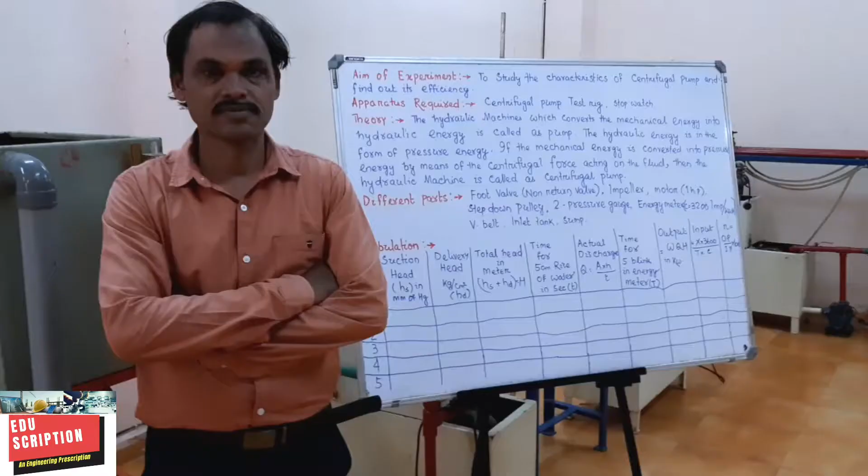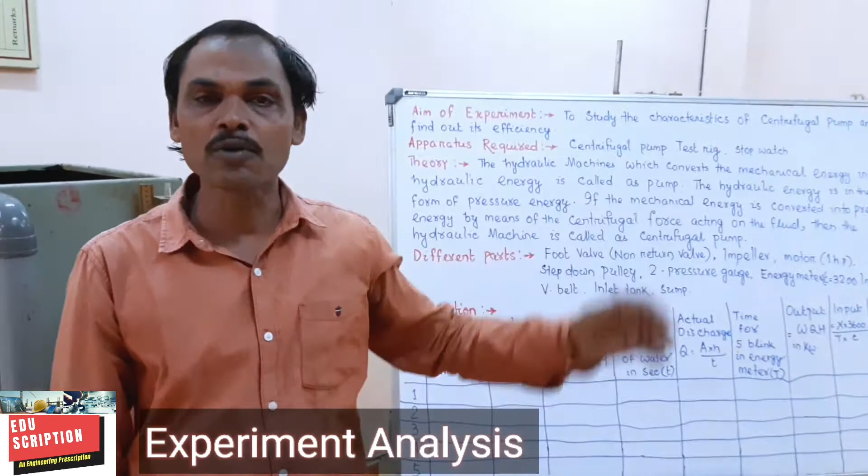Okay, my dear student, today we discuss the centrifugal pump. So first of all, your aim of the experiment is to study the characteristics of a centrifugal pump and find out its efficiency. Clear about it?

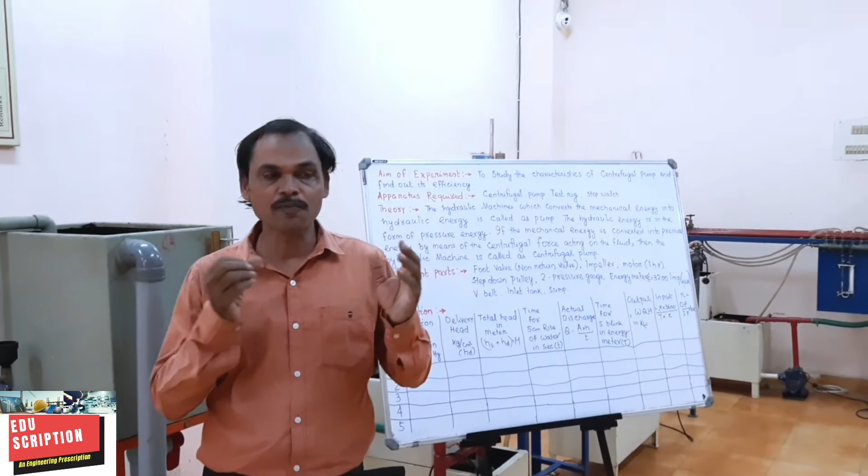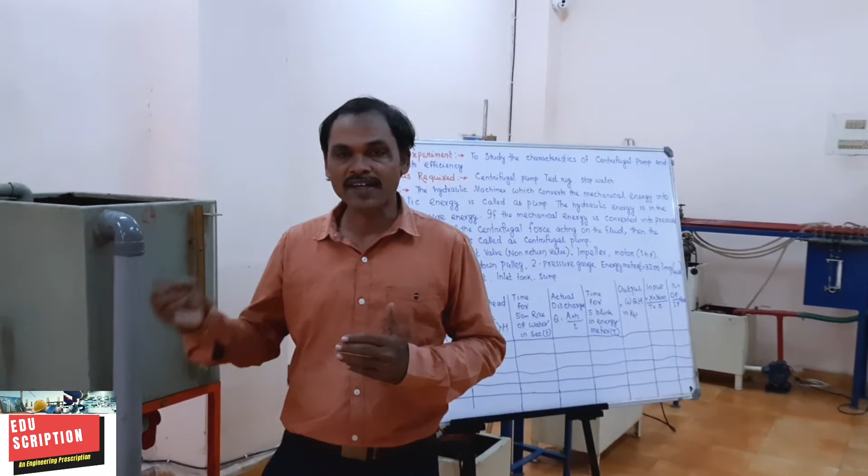So first of all, what is a pump? The hydraulic machine which converts mechanical energy into hydraulic energy is called a pump. The hydraulic energy is in the form of pressure energy. Clear about it? So if the mechanical energy is converted into pressure energy by means of centrifugal force acting on the fluid, then the hydraulic machine is called a centrifugal pump. Clear about it? Next we move to the different parts of a multi-speed centrifugal pump.

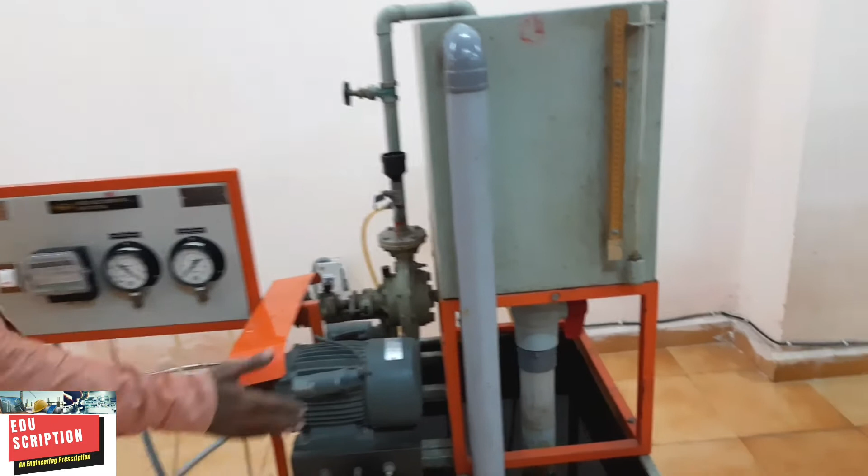So this total arrangement is your test rig. Now we start from the bottom. This part is the sump. Here is the suction pipe, and at the tip of the suction pipe there is a non-return valve, which is called the foot valve. That means the water will flow in one way only, not return downward.

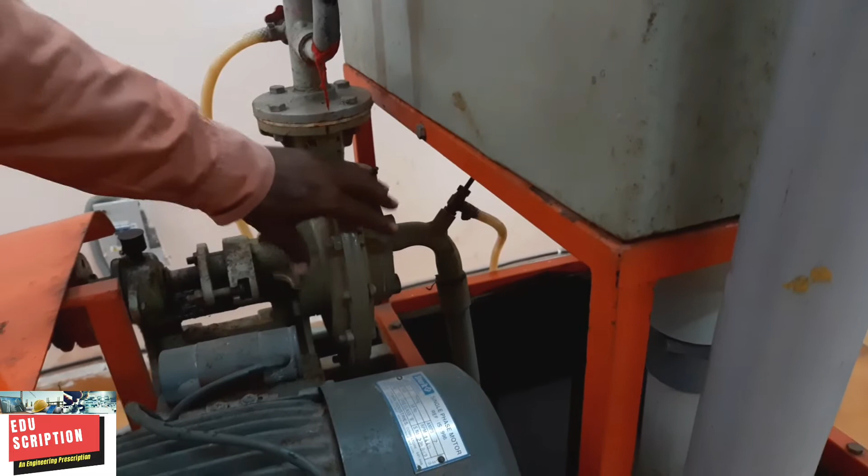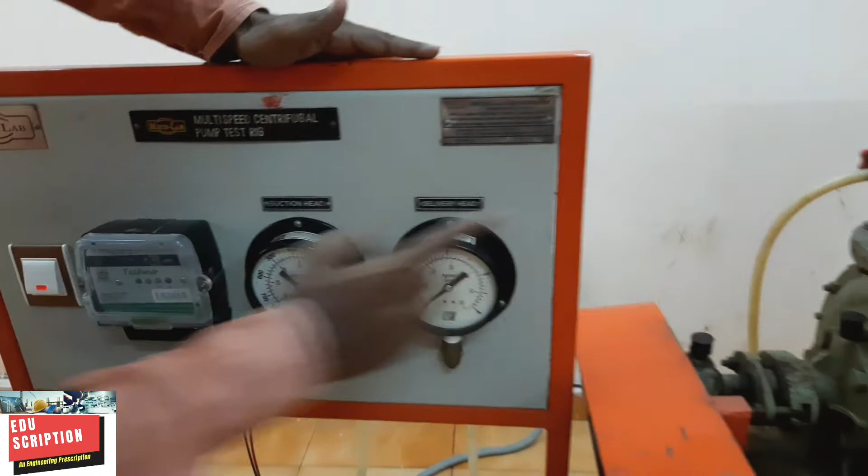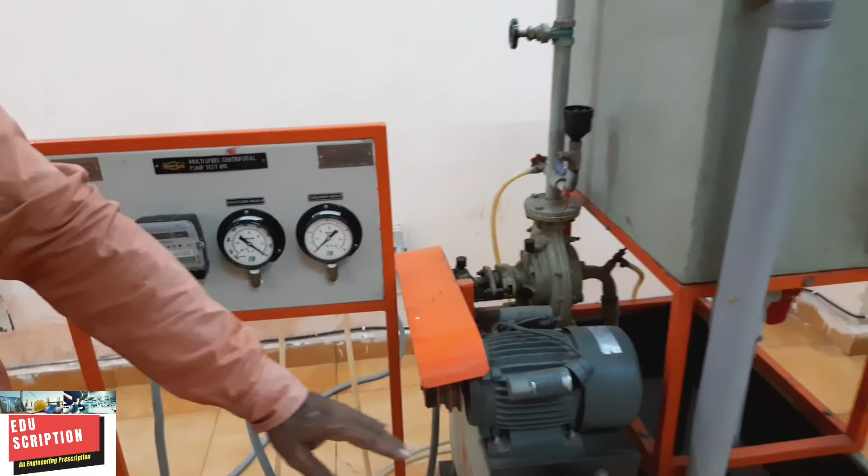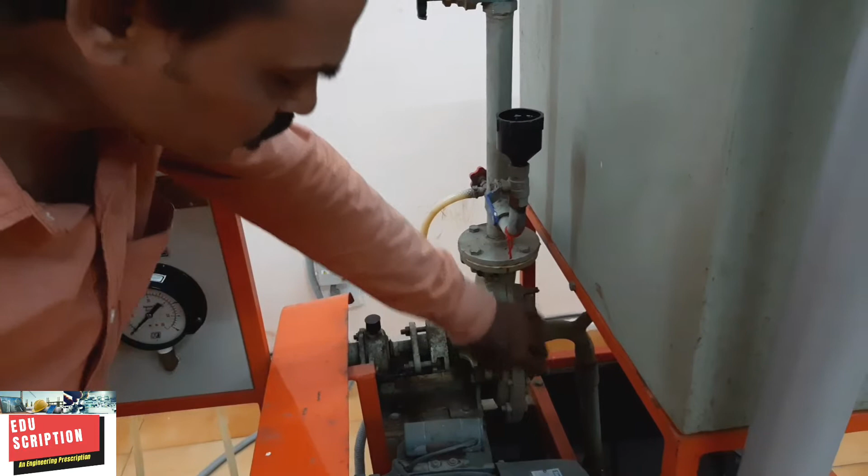Next part is the impeller. Before the impeller, one cock is arranged here. This indicates the suction pressure in the panel board. That is your suction pressure. The impeller consists of a series of backward curved vanes, and it is mounted on this shaft. The upper part is the casing which covers the impeller.

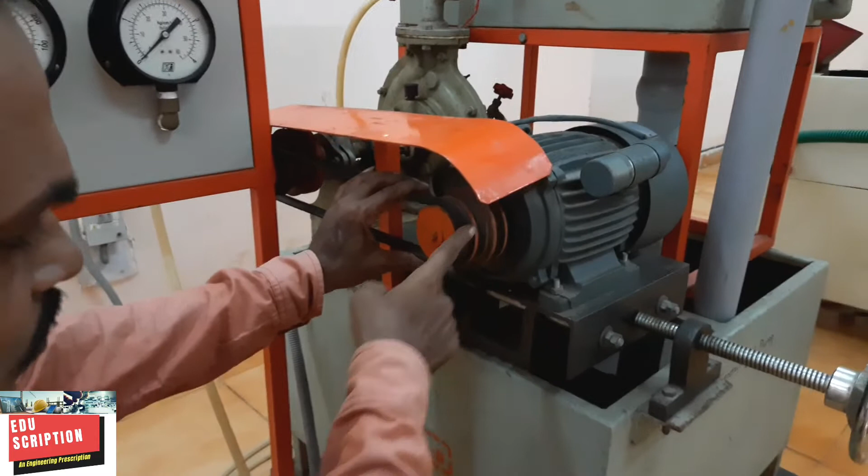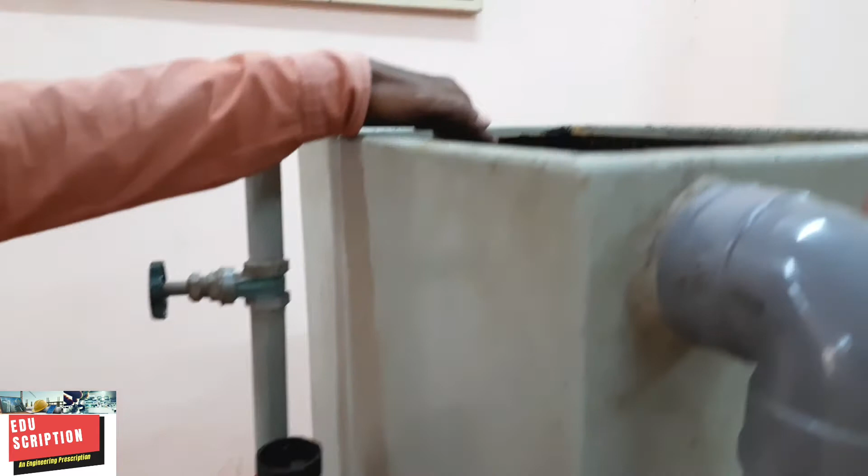Similarly, this is the motor of 1 HP capacity. And this motor is connected with the step cone pulley. Here one V belt is arranged. Through this V belt, power will transmit here. When the motor rotates, this shaft rotates through the step cone pulley. Clear, my dear student? When the shaft rotates, the impeller rotates, and the water is pressurized and delivered to the delivery pipe. Here another cock indicates the delivery pressure in the panel.

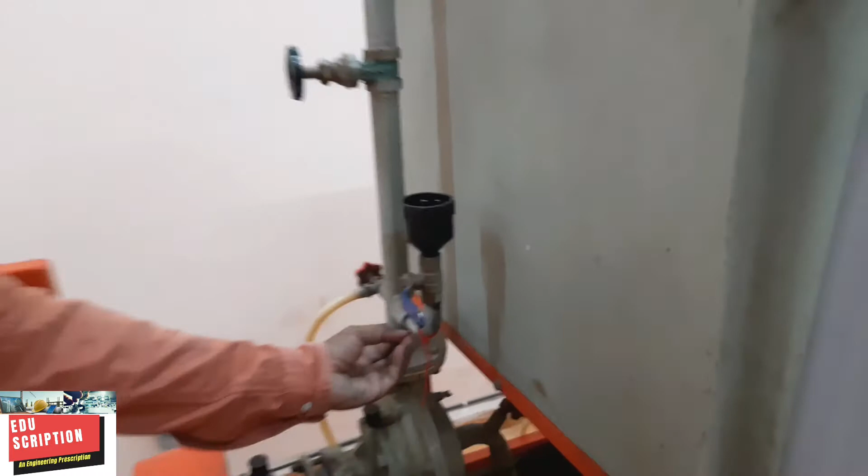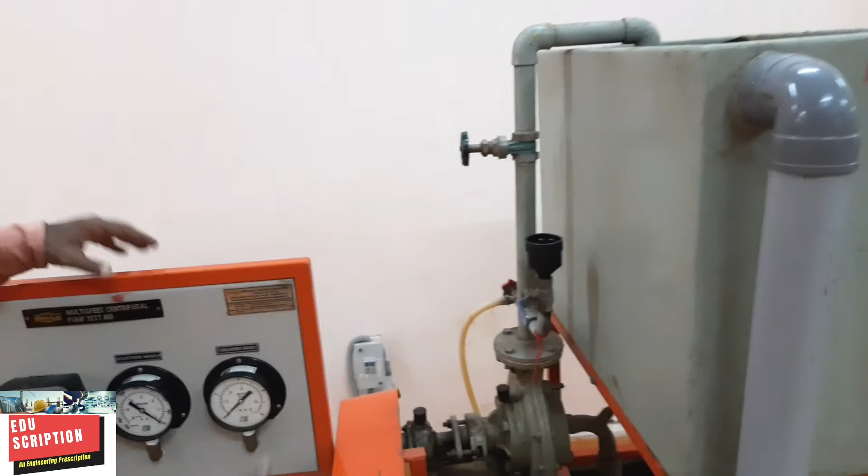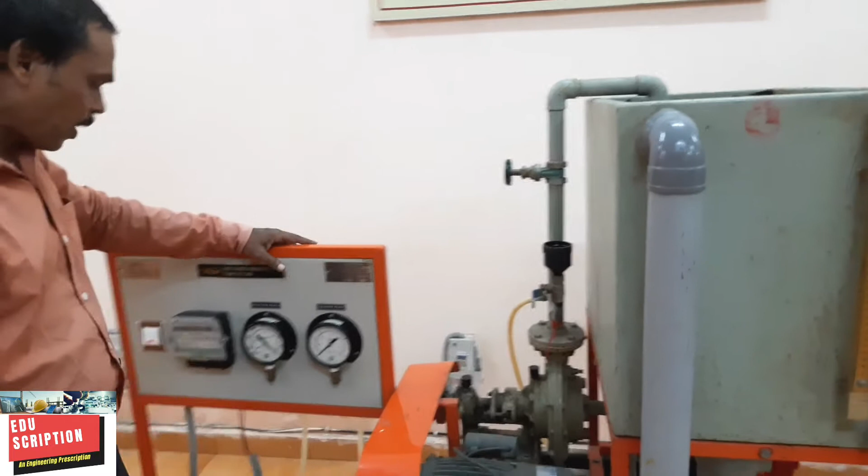Next part plays an important role in your centrifugal pump. This is called priming. If there are air bubbles inside the suction pipe, it will remove them. When we open it and add water here, the bubbles rise up. This improves your pressure. If bubbles are inside, they obstruct the pressure. Next part is the opening and closing valve of the suction and delivery pipe. And this is the delivery tank.

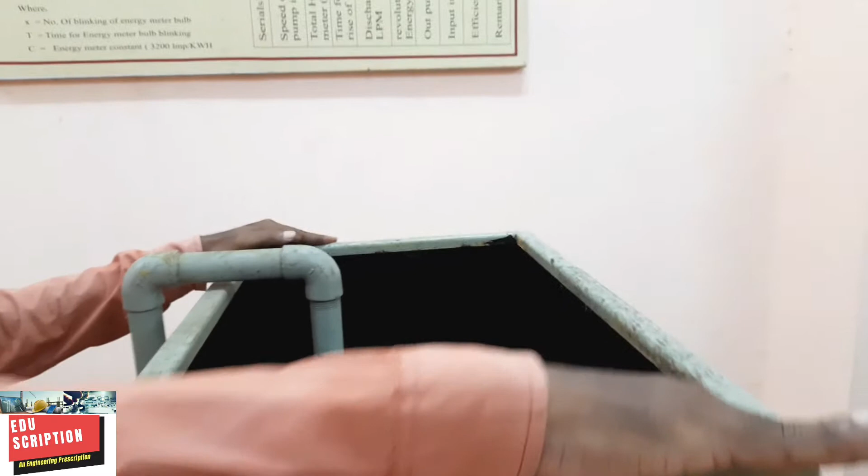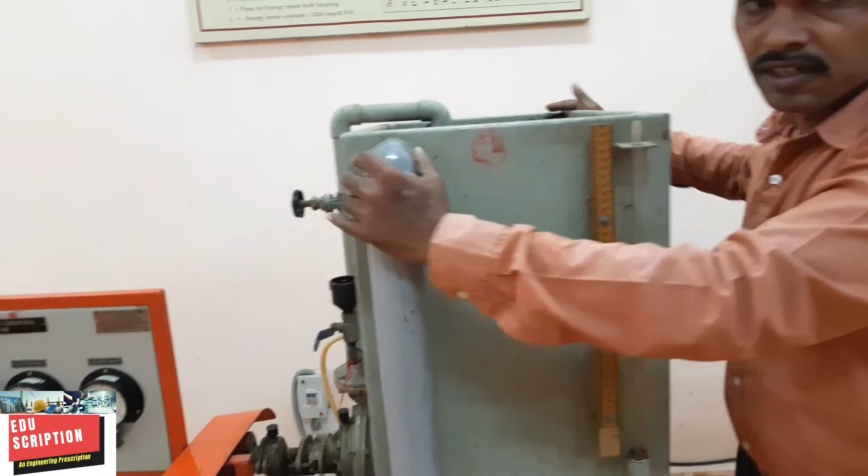For finding out the delivery discharge, the formula is Q = A × H / T. The area of the outlet tank is already given. We find the height of the water level inside the outlet tank by this scale. This is a piezometer which indicates the water level in the outlet tank. After the experiment, we open this valve, so the water drains and goes to the sump.

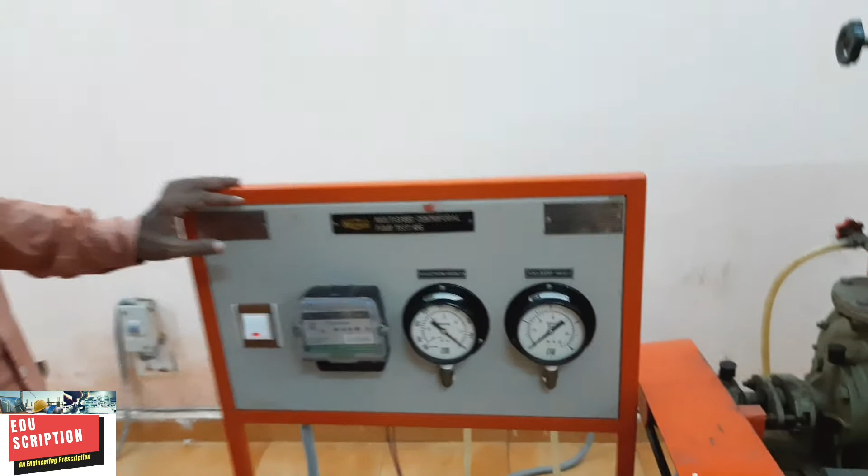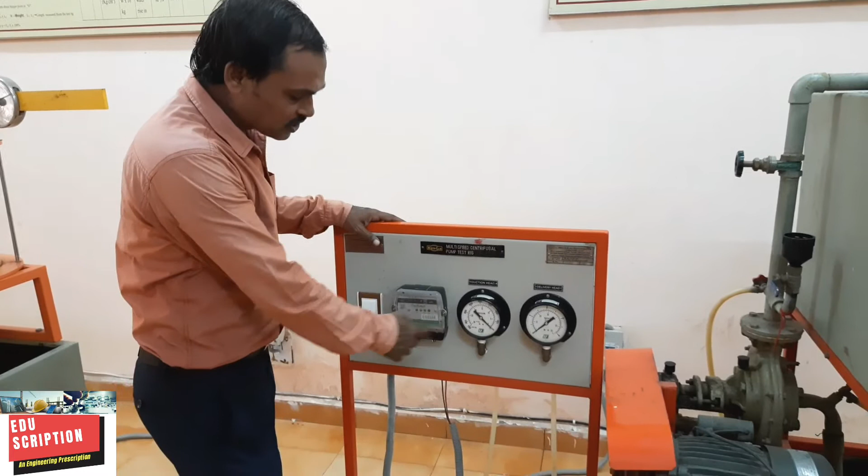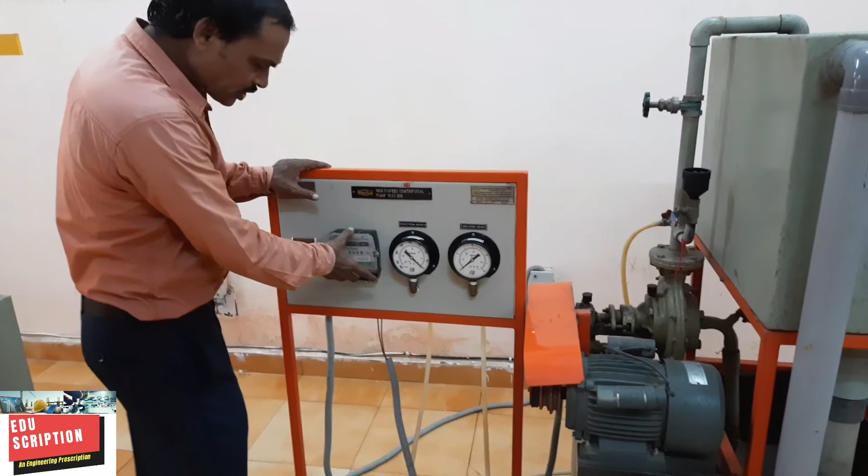The vital part is the energy meter, which gives the power to the motor. Here is the on-off switch, and this energy meter capacity is 3200 blinks per kilowatt hour. For 1 kilowatt hour energy consumption, 3200 impulses. This is the input part which supplies the motor, and similarly from the outlet tank we find the output.

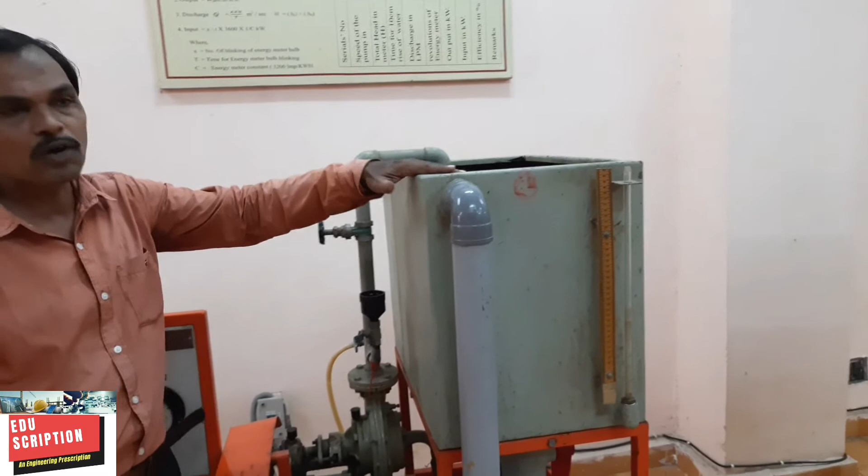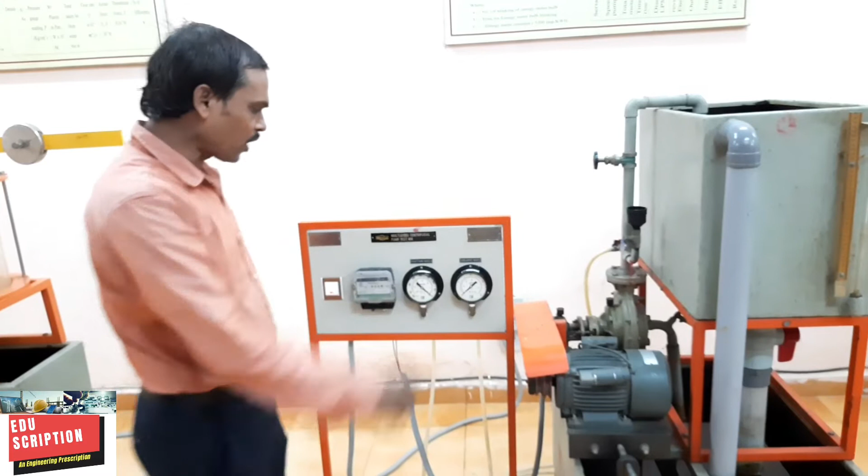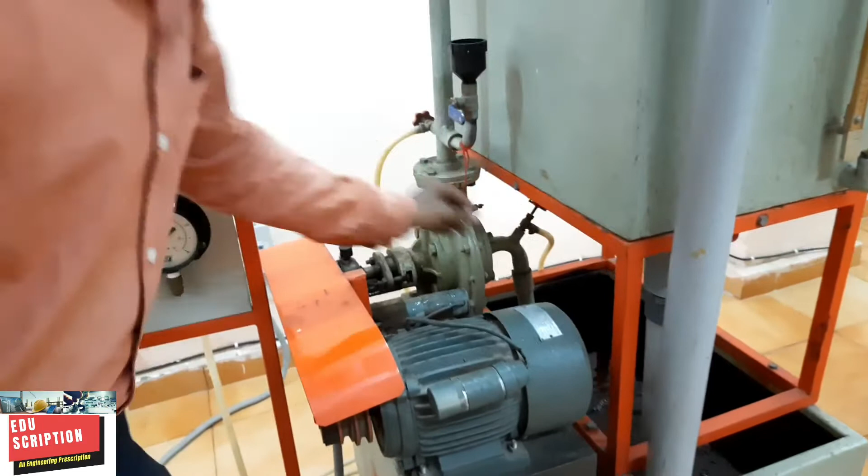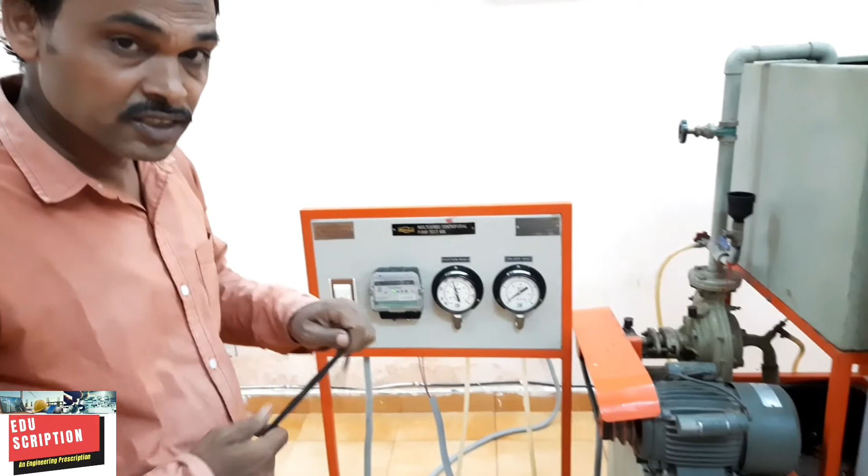Next, we take observations from this multi-speed centrifugal pump. First of all, close all the cocks fully, so the pressure should be 0. Now first start the supply, then open the suction pressure and delivery pressure cocks. Now slowly, always keep your stopwatch in your hand. Now here it is blinking.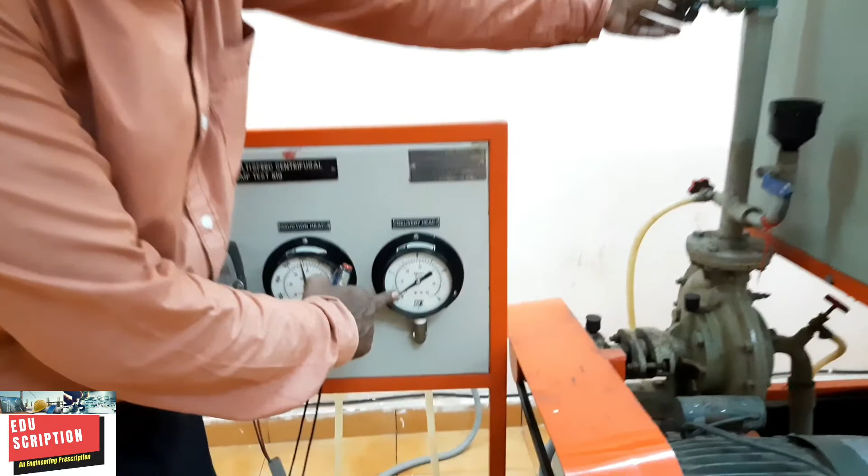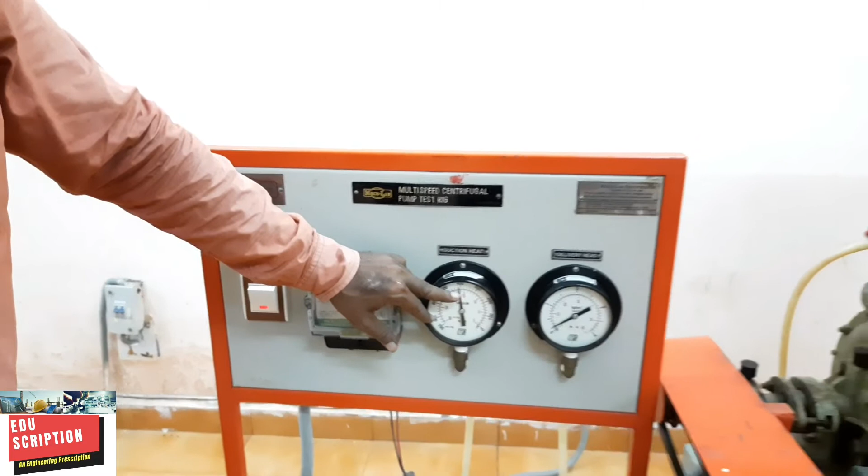You adjust this knob by closing the flow rate. When it is at 0.1, your delivery pressure is 0.1. At that time suction pressure is 490. Clear? Now start timing for 5 blinks. How much time will be taken?

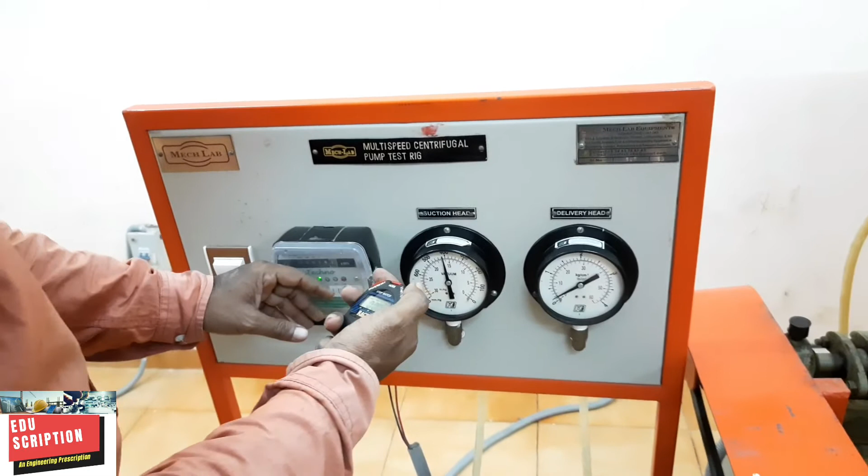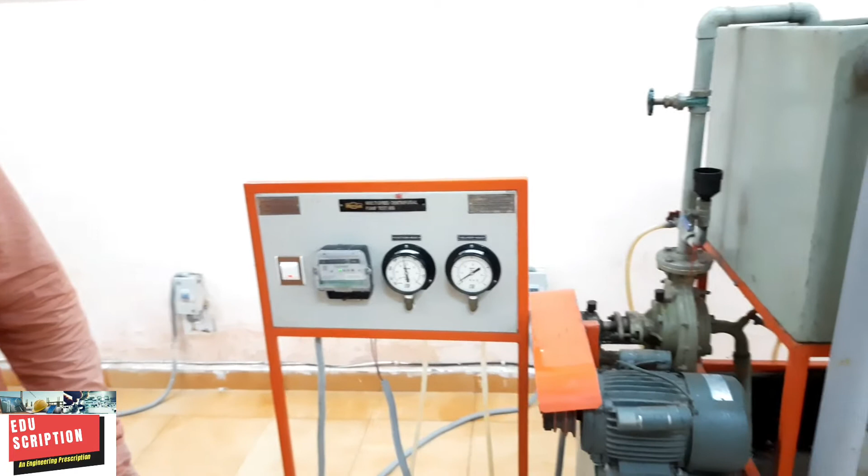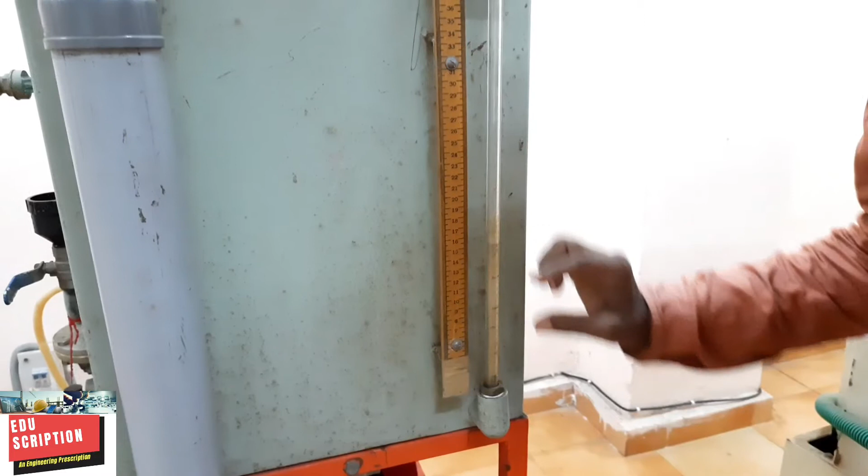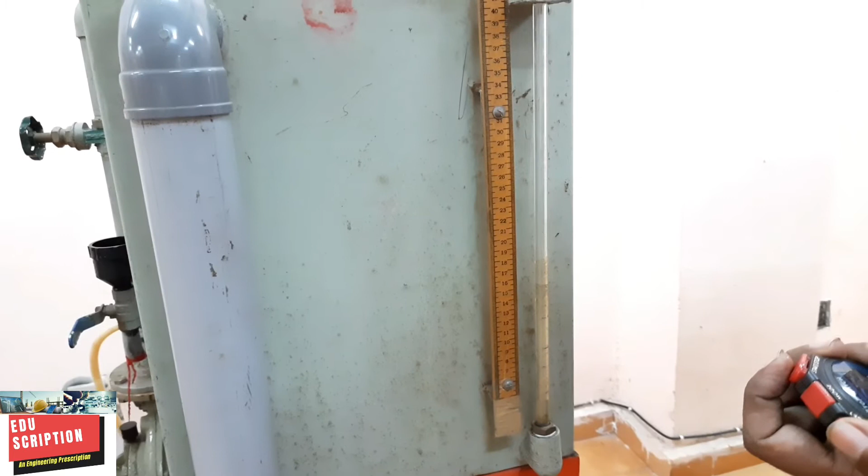Okay, now it is 8.50. Clear about it? Similar way to close the outlet valve. And here also we mark the water will rise up. For 5 cm height, how much time will be taken? Similar way to take that. Okay, now stop it. So it is 9.07.

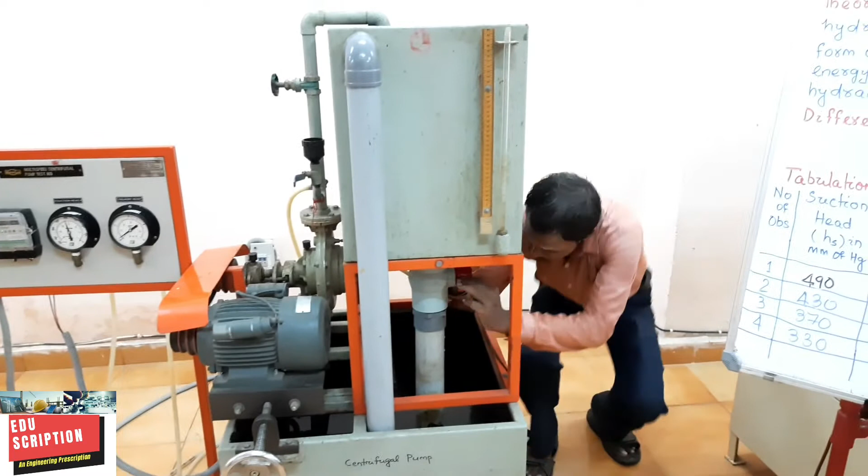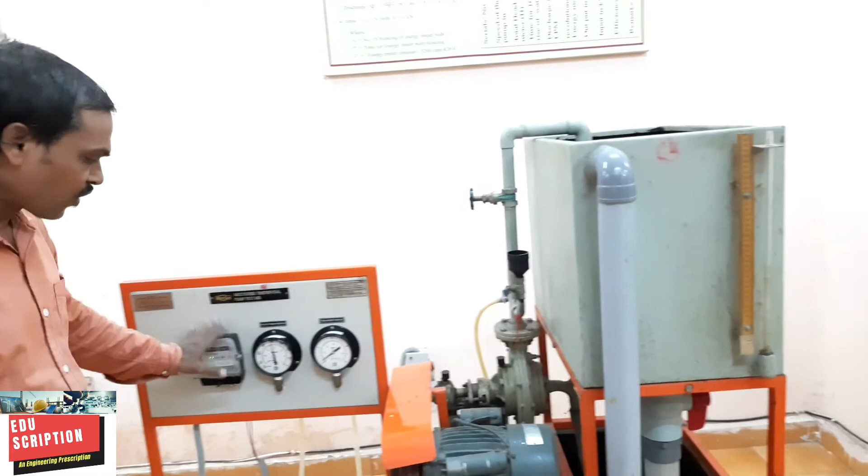Immediately, my dear student, immediately you open the outlet, because if any air particle should be there, then it will come. So immediately open the water, that's why the water should return towards the sump. So from the energy meter take the timing. Similar way take the timing here. This is for the calculation of the IP.

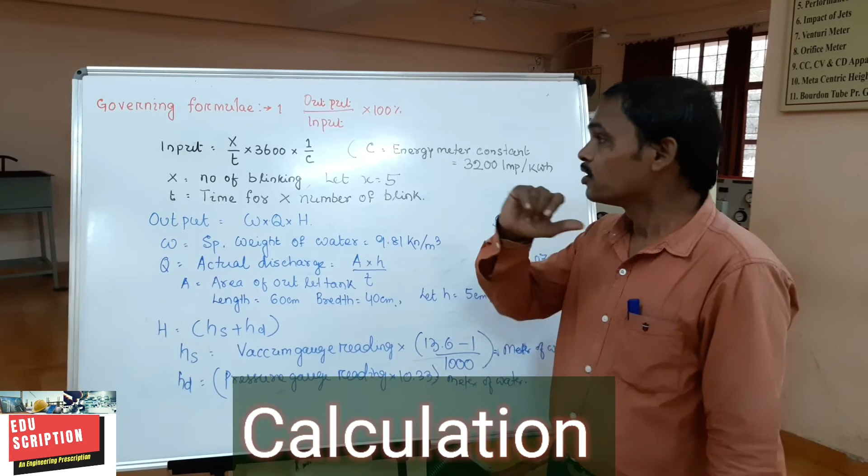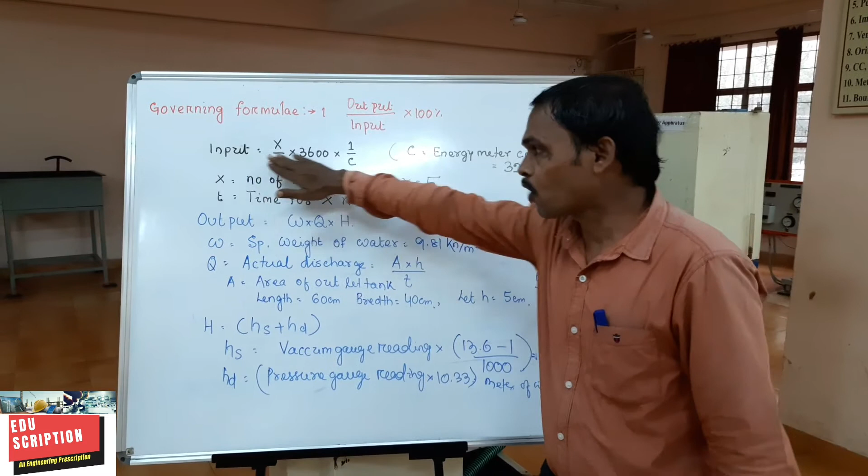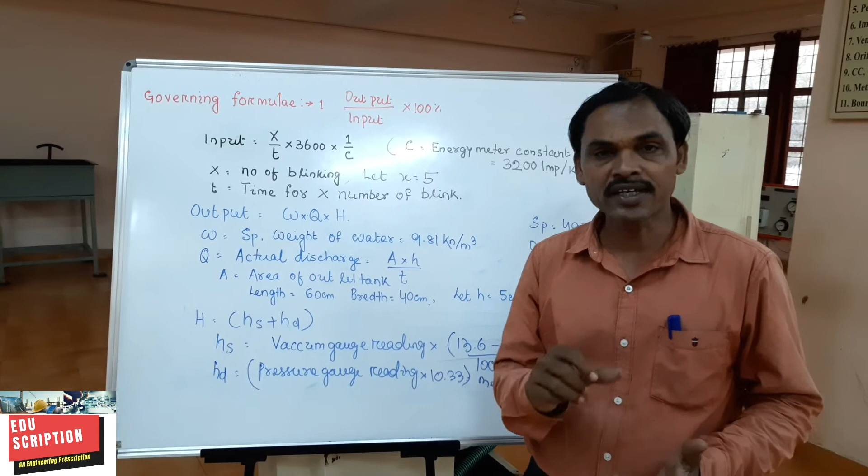Okay, my dear student. Next part is your governing formula. So basically output by input, we have to find out the efficiency. That formula is your output by input into 100. Clear about it? For input, the formula is x by t into 3600 into 1 by c. So x is the number of blinking. Already in your experiment we are taking 5 number of blinking. For 5 number of blinking, how much time will be taken? That is a small t.

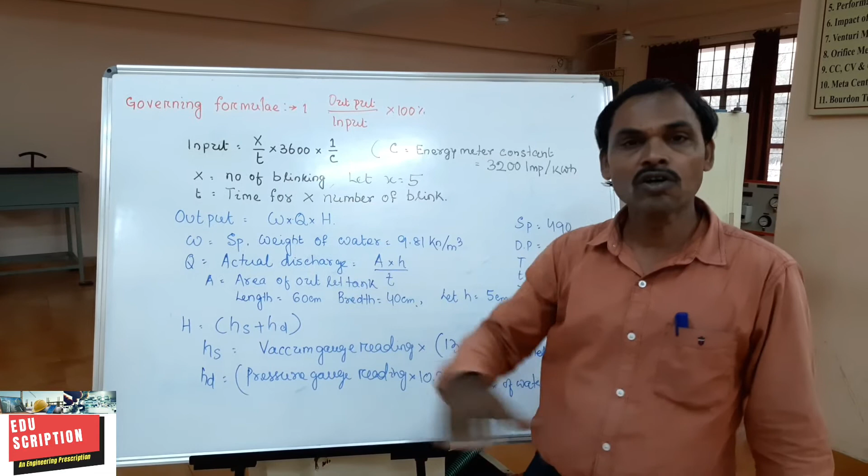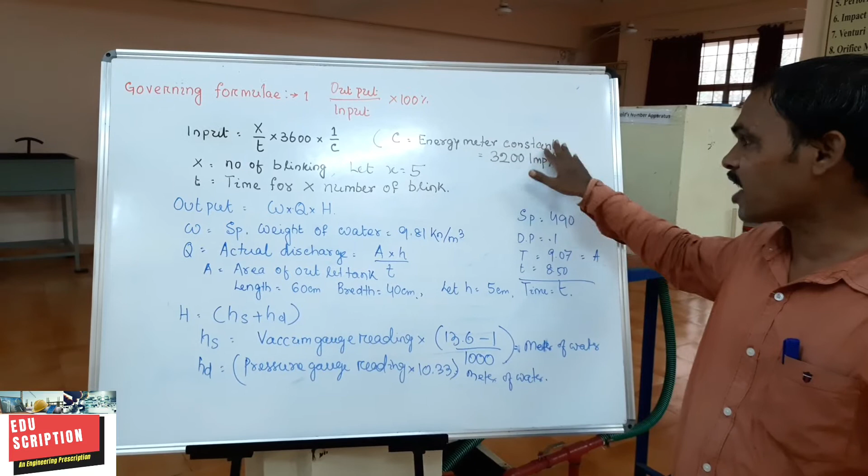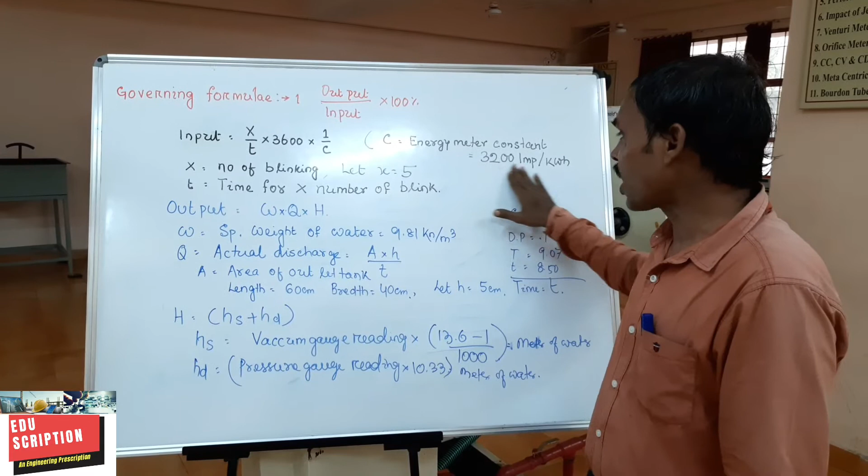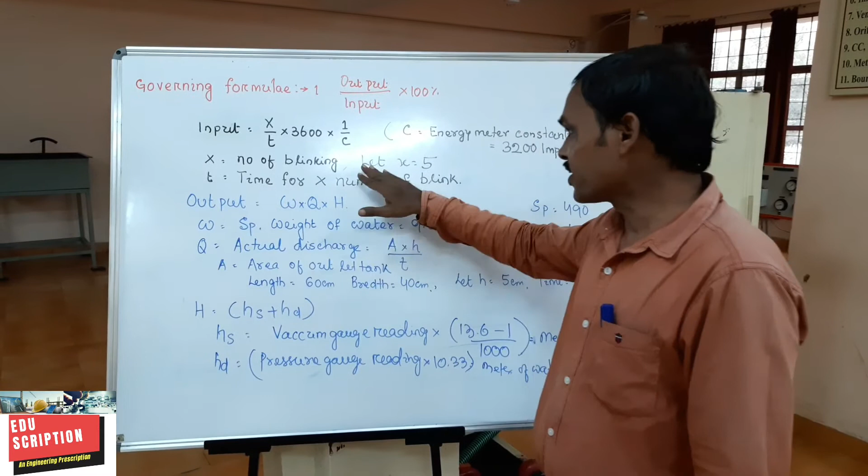Clear about it? 3600 is your hour to second. Clear? And 1 by c is the energy meter constant, which is 3200 impulse per kilowatt hour. Already we discussed how the energy meter constant is 3200 impulse per kilowatt hour. For 1 kilowatt hour, its blinking is 3200. Similar way, we are taking here x is equal to 5. That means 5 blinking. For 5 blinking, we are taking the time.

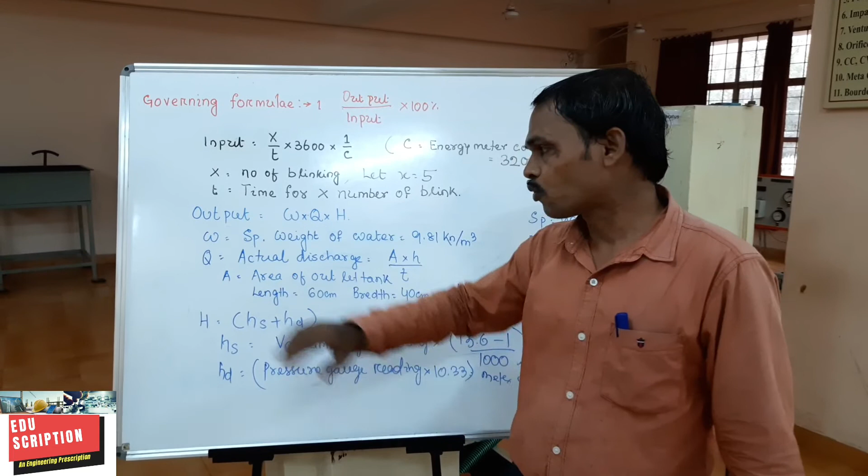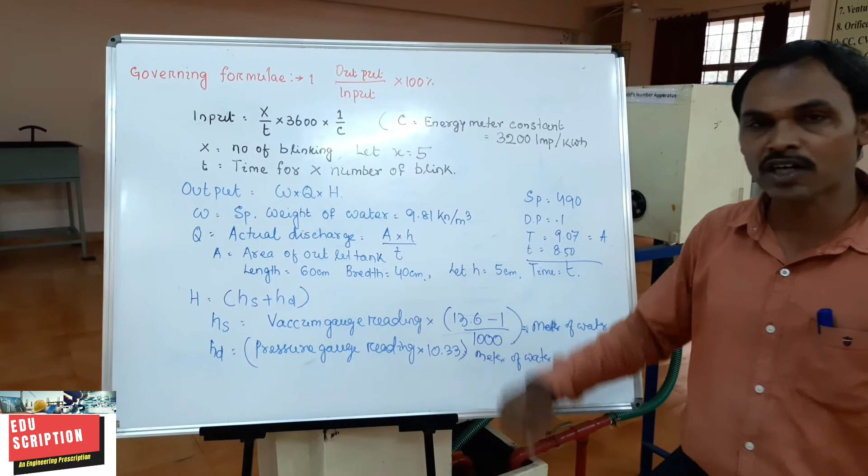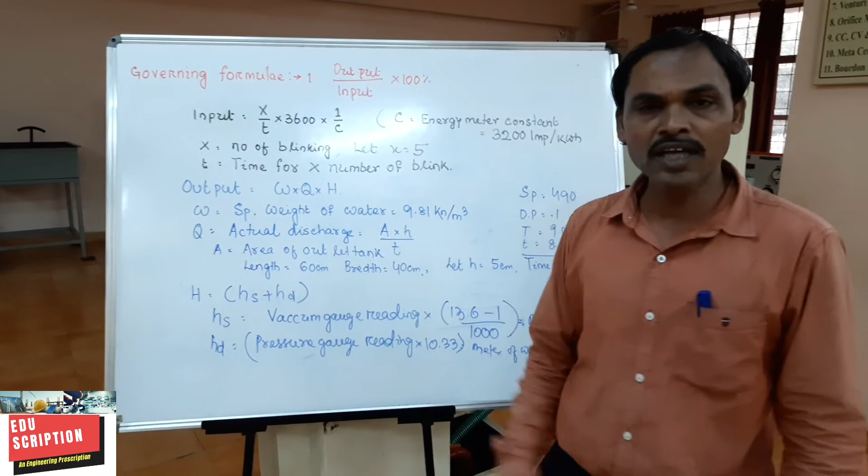Similar way for output. Output is your WQH. Here W is the specific weight of the water. That was already data given, 9.81 kilonewton per meter cube. Similar way Q, already we discussed about it. Q is the actual discharge of the fluid flow. So that formula is your A into H by T. That A is the area of the outlet tank. Already the data given: length is 60 and breadth is 40, 60 centimeter and 40 centimeter.

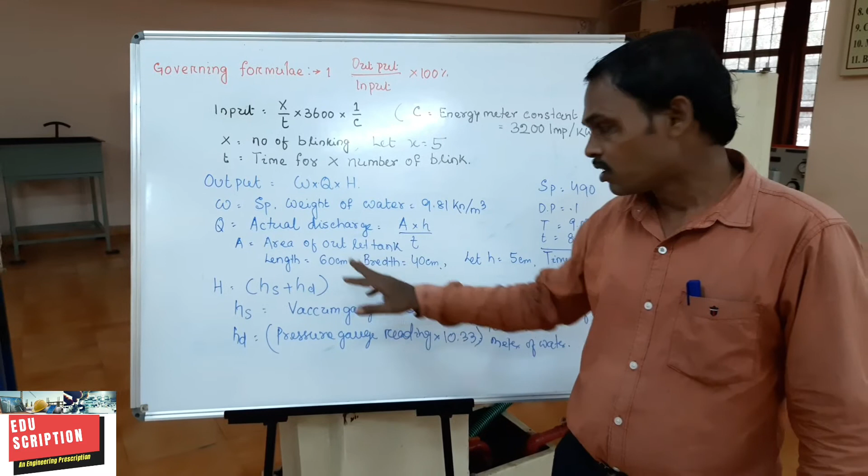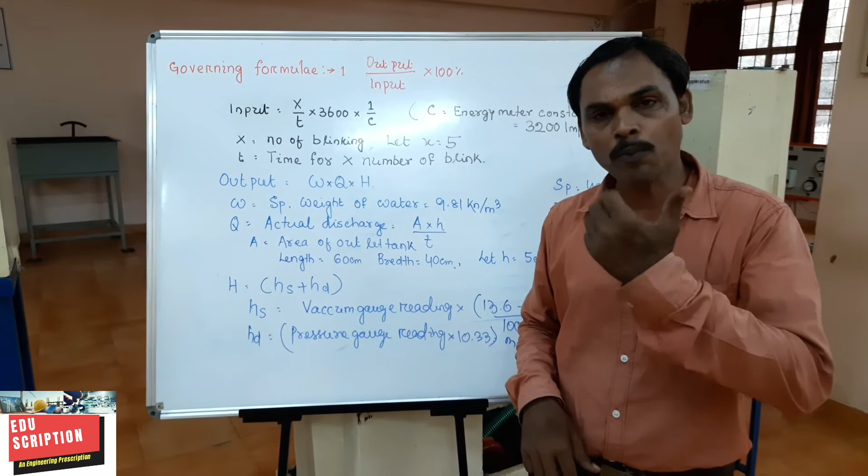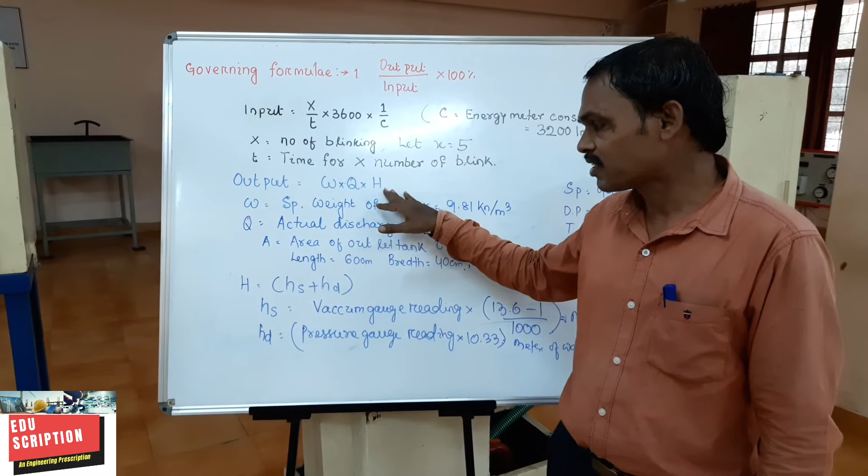And here also we take for 5 centimeter height, how much time will be taken, that was taken by your stopwatch. So this is your 5 centimeter. For 5 centimeter height, how much time will be taken? Similar way, the last one is the H. This H is the total head. For total head, we add two, suction head and delivery head.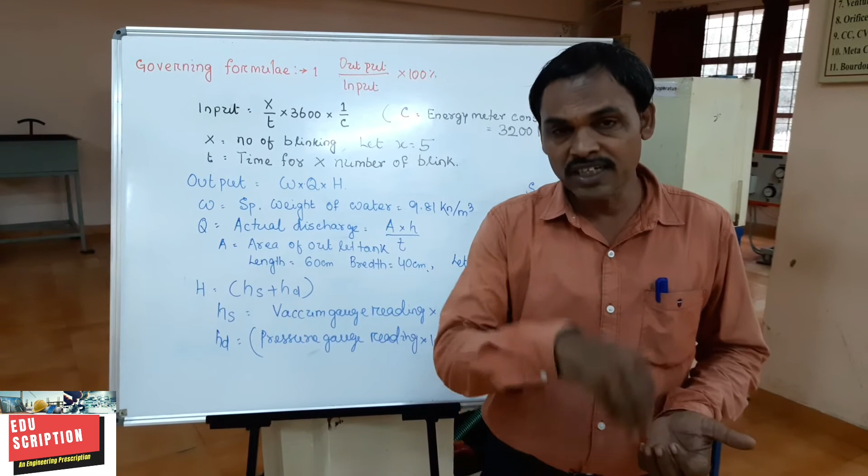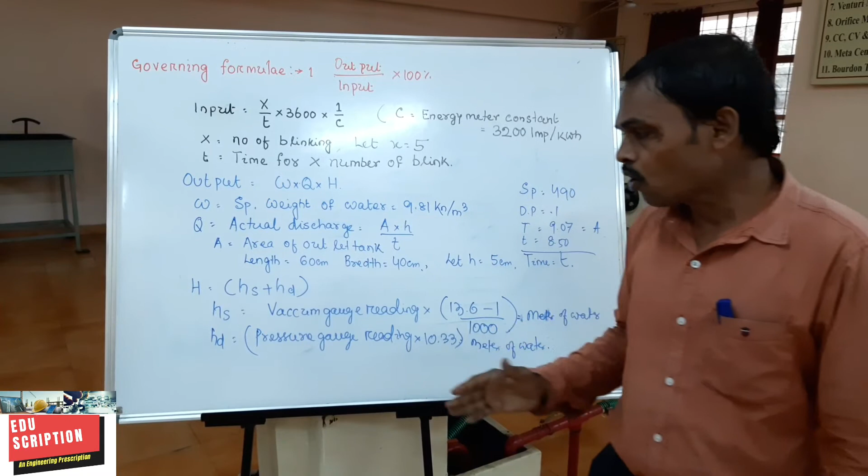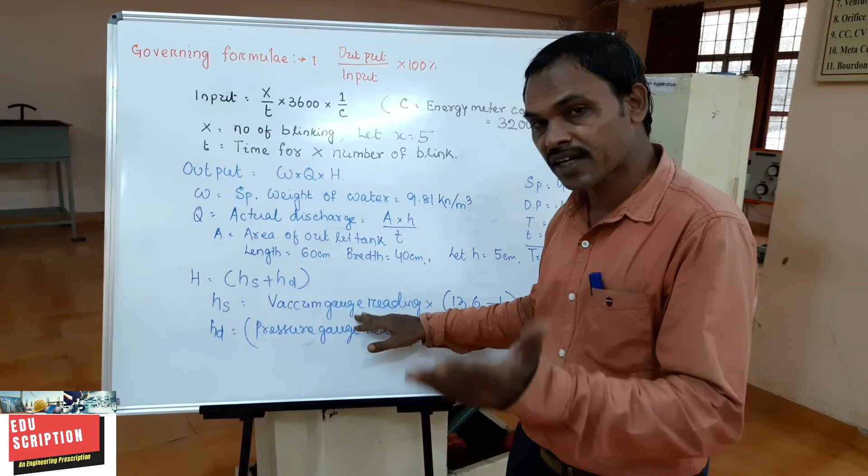Before proceeding, initially we take the pressure, vacuum pressure and delivery pressure. We convert that pressure into pressure head. Okay, clear about it, my dear student? So, that is in meter of water, when you convert from pressure to pressure head. Now, HS is the suction head, that is your vacuum gauge reading taken into 13.6 minus 1 divided by 1000. When you multiply this, that is in meter of water.

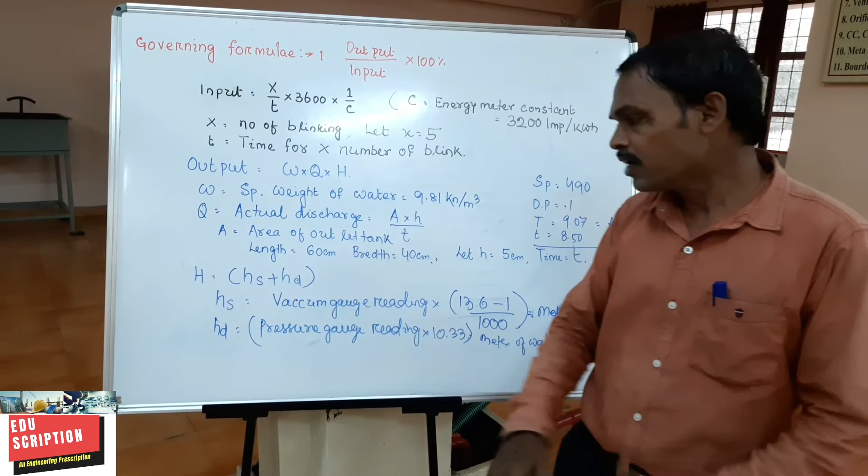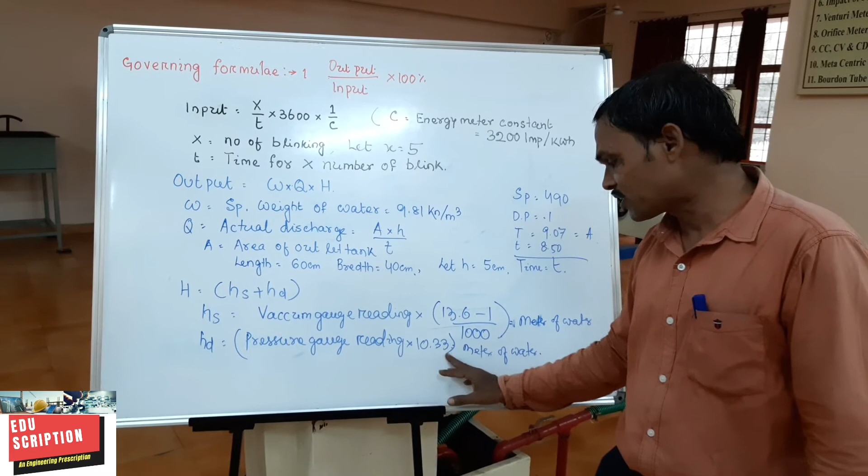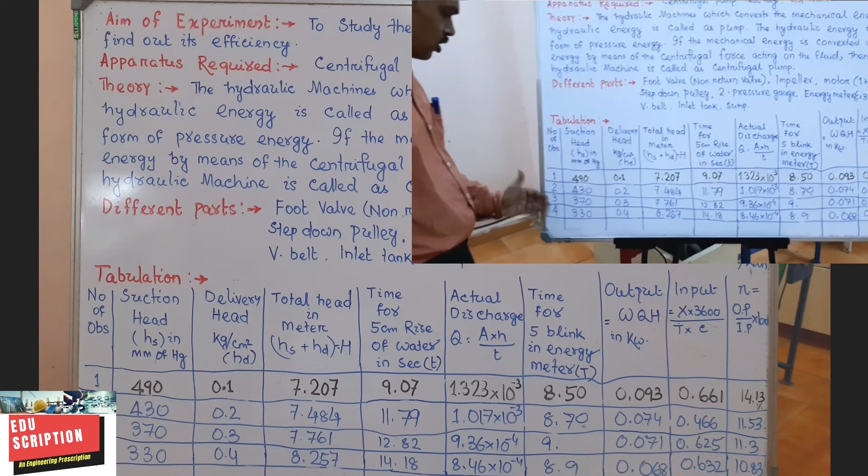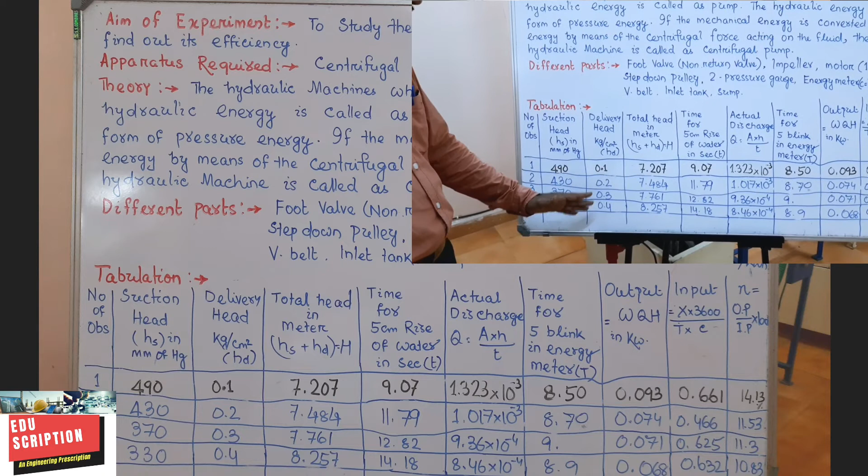Similar way, HD, the delivery pressure. The pressure gauge reading into 10.33. When you multiply with 10.33, that is meter of water. You add these two, HS plus HD, you find out the total head. Then, output formula is your W, Q and H. Clear? Already we are taking 4 observations here. So, here the suction head is like this, HS 490, 430, 370, 330. Similar way, delivery head and total head HS plus HD.

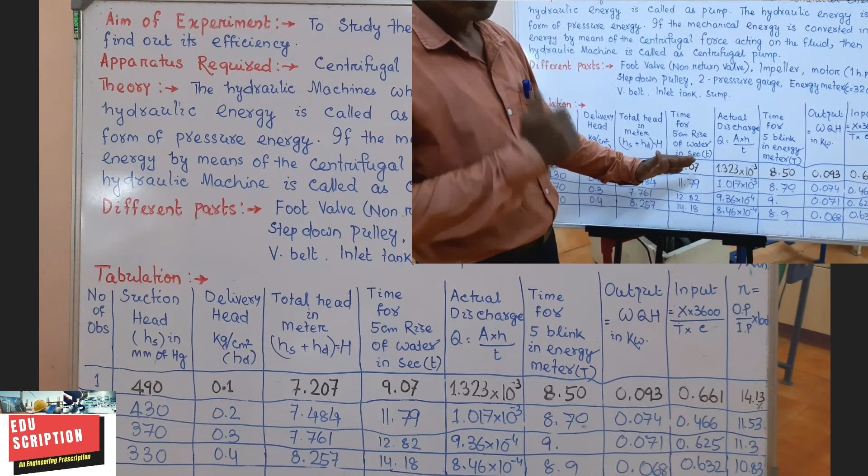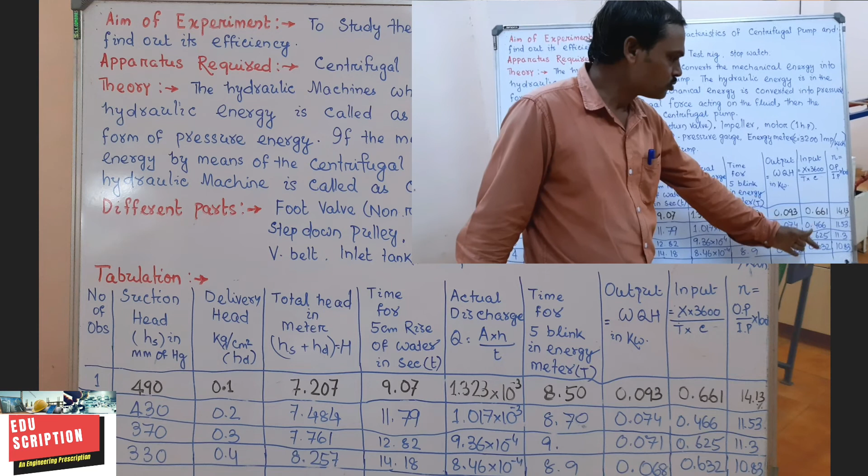Time for 5 centimeter rise of water in the outlet tank. From that you find out the total Q. And similarly, actual discharge is your Q equal to A into H by T. Time for 5 blinking of energy meter, which is needed for your input. Output WQH, that is in kilowatt, similarly input. So finally we find out the efficiency. So this is clear about your centrifugal pump.